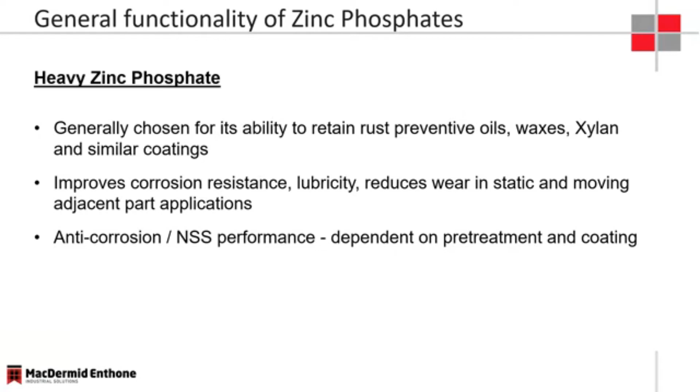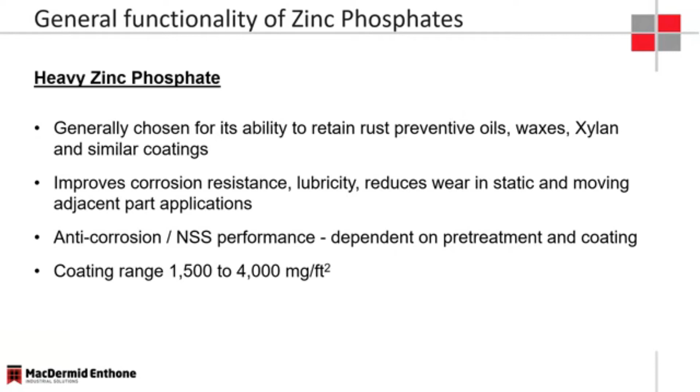Some examples that we can give would be if we look to the automotive industry as an example and look at heavy zinc phosphate and oil specifications. Typically, those are going to require anywhere from 24 to 168 hours of neutral salt spray performance. At an opposite extreme, if we look at the oil and gas industry and look at fasteners coated with heavy zinc phosphate and used in combination with a fluoropolymer coating, those can achieve up to 3,000 hours. So again, the anti-corrosion performance is entirely dependent both on the quality of the pretreatment as well as the coating selected. And the requirements for this class of zinc phosphate are typically going to fall within coating ranges of 1,500 to 4,000 milligrams per square foot.

The calcium modified zinc phosphates are frequently used as bases for paints or other organic coatings. They're used extensively in rubber bonding applications, and we see their use in the automotive industry for coefficient of friction modification. The effect of the calcium in these formulations is to limit the size of and effectively modify the crystal structure of the coating.

This results in a very densely packed coating consisting of very small granular looking crystals when you look at it under magnification. And it's for this reason that you'll often hear these referred to as microcrystalline processes. Now, unlike a non-calcium modified zinc phosphate, this class is going to incorporate a small amount of calcium in the layer, and this lends itself to the very desirable functional properties of this phosphate class for the applications in which they're used.

Now, as I mentioned at the top of the slide, these are used frequently as bases for paints or other organic coatings. A big reason for that is due to the chemical resistance that they have and their ability to limit corrosion spread if the coating is damaged. You'll often hear this corrosion spread referred to as creep in the specifications. I also mentioned at the top that this class is used extensively in rubber bonding applications, and that is because of their ability to withstand frequent and very high vibrational stress loads like those encountered in the noise and vibration isolation applications of rubber bonding.

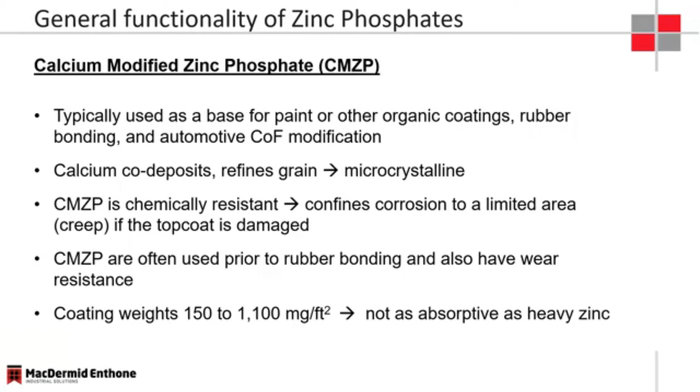The typical coating weight requirements for this class are going to fall within the 150 to 1100 milligram per square foot range. And because of the reduced layer thickness of this class, as well as the crystal morphology of this class, they're not nearly as absorptive as the heavy zinc phosphates.

The cold forming zinc phosphates are going to be used in metal deformation applications, and I've listed several examples here. And because of the very high friction loads involved in these kinds of applications, the phosphate is going to be used in conjunction with a lubricant.

We find that these are typically formulated as nitrite or chlorate accelerated systems. The reason for that is that these oxidizers limit the iron growth in the bath. And when we limit the iron available in the bath, we limit the amount of iron incorporated into the phosphate layer. By limiting the iron in the phosphate layer, this results in a reduction of abrasion of the phosphate coating, which is a desirable attribute for these phosphates in the applications in which they're used.

To further address the frictional aspects, this class is often going to be used in combination with a grain refiner. This is to create a smoother and more uniform crystal morphology, again, to create a layer that has the desirable characteristics for these high friction applications.

The coating weights for this class are typically going to be required to fall within the 300 to 2000 milligram per square foot range.

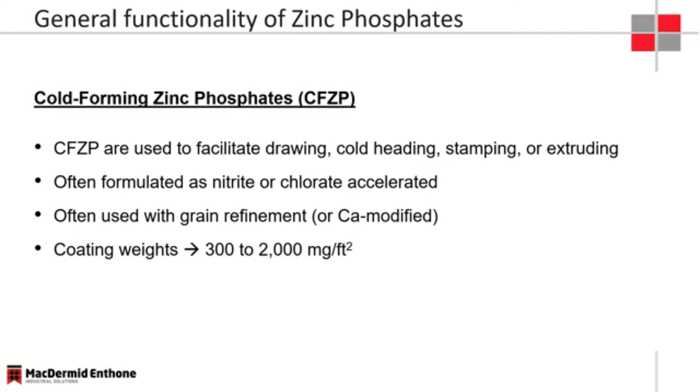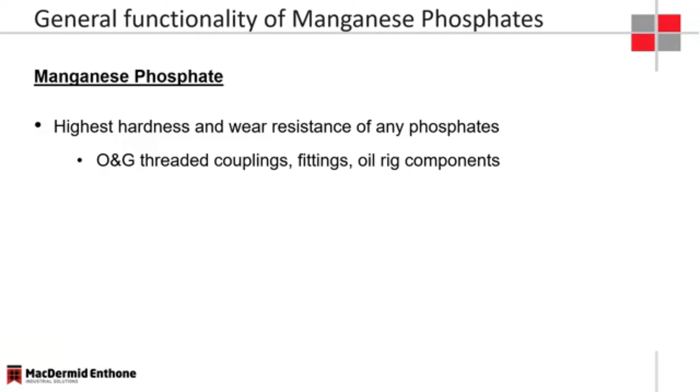The manganese phosphates are by far the hardest and most wear resistant of any of the phosphate classes. For this reason, they are extensively used in the oil and gas industry for coating threaded couplings, fittings, and a variety of oil rig components. They're also extensively used in the automotive industry for coating powertrain components.

The manganese phosphates are far more stable than our zinc phosphates under conditions of very high temperature and pressure. This is due both to the chemical constituency of the manganese phosphate as well as the very densely packed cubic crystal structure of the grain refined manganese phosphate layer.

Unlike zinc phosphates, it's really essential with manganese phosphates to use these in conjunction with a grain refiner. This is to create both a more corrosion resistant layer and to create the wear and friction resistant crystal structure required for its high wear applications.

Coating weights for the manganese phosphates are typically going to be required to fall within the 750 to 3000 milligram per square foot range.

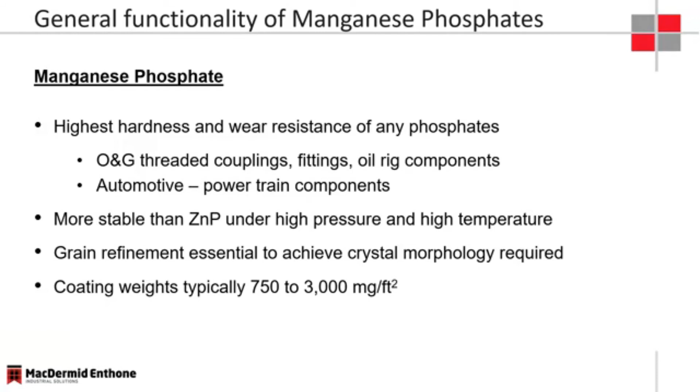Now let's take a look at MacDermid Enthone's nickel-free best-in-class products, beginning with the zinc phosphates first and KeyKote 501. KeyKote 501 is a nitrate accelerated product. It is a single component calcium modified product that is commonly used in pre-paint and rubber bonding applications.

The 501 process offers customers the flexibility to operate this as a nitrite accelerated process by using the additive KeyKote 303. When we operate KeyKote 501 in this manner, it allows for a significant reduction in operating temperature of as much as 18 degrees.

KeyKote 514 is also a nitrate accelerated product. This is a two-component calcium modified product that is commonly used in both pre-paint and cold forming applications. And I'm a big fan of two-component zinc phosphates because of the stability and enhanced performance that they can bring to the table.

KeyKote 750 is once again a nitrate accelerated process. This is a two-component mid to heavy coating weight product that is commonly used in applications where either corrosion control is needed or lubrication is needed.

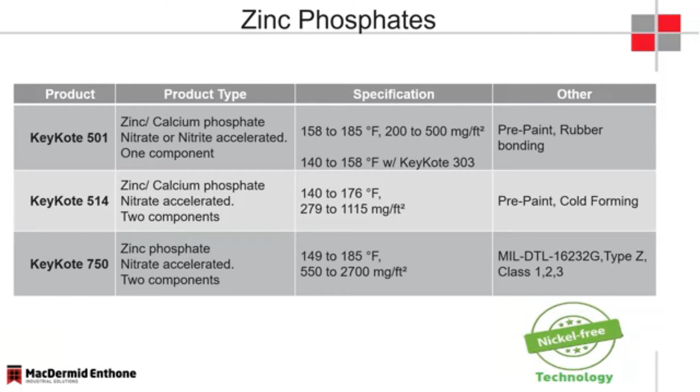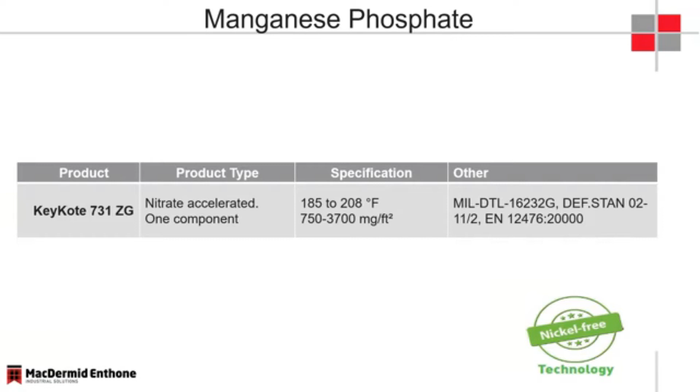We purposely chose these alloys because they're often associated with difficulties in consistently obtaining coating uniformity, coating weight, and adhesion in the field. What's noteworthy here is that we were able to achieve complete coverage, uniformity, and adhesion across all of the alloys at just 185 Fahrenheit with 10 minutes immersion and without the need to change bath parameters.

By way of contrast, typically if you were trying to phosphate these alloys using a traditional nickel catalyzed manganese phosphate process, you'd be operating at significantly higher temperatures of typically 200 to 210 degrees Fahrenheit. So with the 731ZG process, we were able to shave 15 to 25 degrees from a typical nickel catalyzed system without compromising performance, and again, without having to change bath parameters.

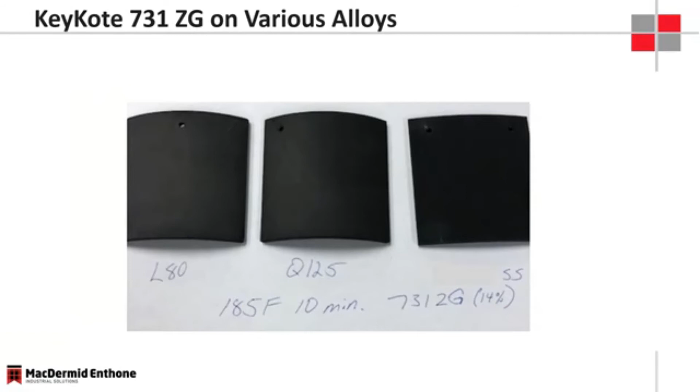With that, let's take a look now at the advantages associated with our nickel-free processes. Regardless of whether we're talking about nickel-free zinc phosphates or nickel-free manganese phosphates, our nickel-free phosphates operate at significantly lower temperatures of as much as 30 degrees below their nickel catalyzed counterparts.

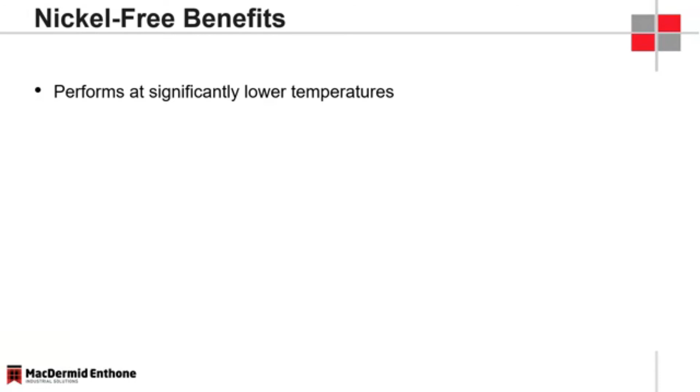And they yield very consistent coating weights and adhesions, even on traditionally difficult to phosphate alloys, like the examples I list here. In addition, we've designed these processes to limit the soluble iron in the bath.

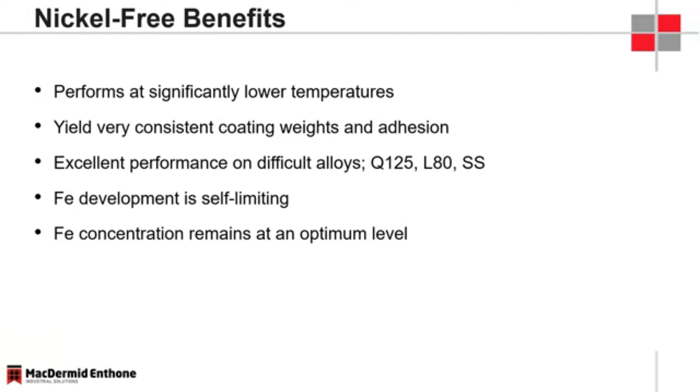What this means is that when operated properly, these baths will maintain the soluble iron within the optimum concentration range, which falls between 3 to 9 grams per liter. And what we find is that by maintaining the iron within this optimum range, it has a stabilization effect on the bath, resulting in less sludge formation.

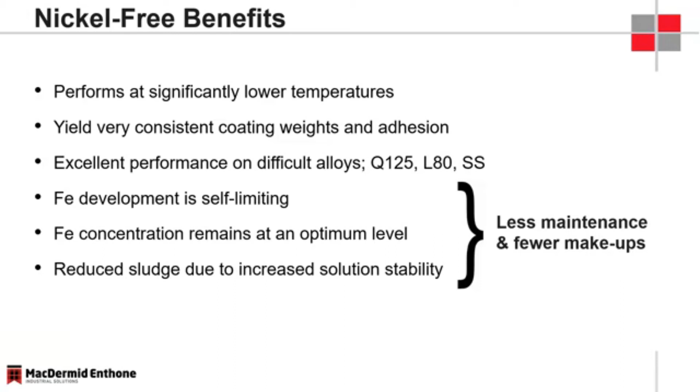All of these combine to translate into less maintenance required of the bath, as well as fewer bath makeups required.

So with that, now let's turn our attention and look at a couple of success stories. Again, these will deal with converting customers who had been using traditional nickel catalyzed systems to our nickel-free technologies. I'm not going to refer to the actual names of these customers. I'll merely refer to them as customer A and customer B.

So let's begin by looking at customer A, who is a manufacturer of pipes and couplings. When we met with customer A, they were dissatisfied with their current process. They were looking for ways to improve the efficiency and effectiveness of their process in several areas.

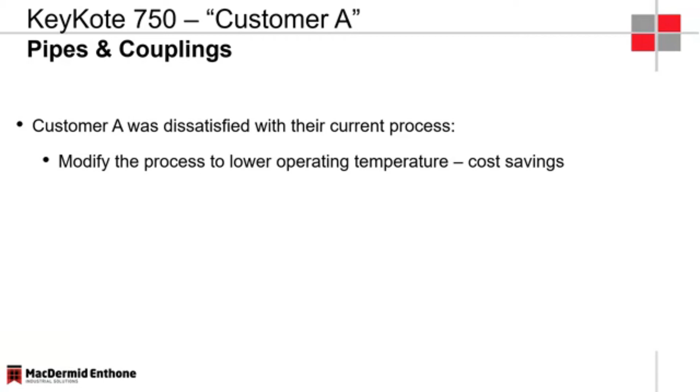One is that they were interested in ways in which they could change or modify the process in order to enable them to operate at lower temperatures. This was driven by their desire to look for operational cost savings.

They were also interested in ways that they could modify the process to improve coating weight and adhesion consistency across the various alloys they had to deal with. That interest stemmed from their current rework rate, which was fairly high. So they were looking at ways in which they could reduce their rework.

Of the alloys that they had to deal with, L80 was typically their biggest challenge. Specifically, they had difficulty consistently meeting their coating weight requirements for the L80 alloy.

And finally, they were interested in ways in which they could modify the process to reduce the sludging of the bath and to reduce the frequency with which they would have to take their tanks down to desludge.

With their current process, they were having to take the tanks down to desludge at a frequency of about every 1 to 2 weeks. So they were looking at ways to expand the window before having to take down the tanks to reduce their downtime.

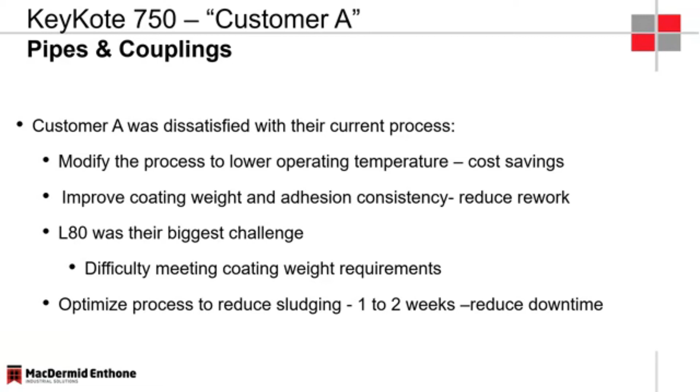So after a few conversations, we decided to go ahead and trial a bath of the KeyKote 750 process. We chose to begin with a 7% makeup concentration and a target operating temperature window of 150 to 155 Fahrenheit.

On the day that we were there to start up the process and lend technical assistance to them, they had equipment issues such that we could not proceed. So it was mutually decided that we would go ahead and leave, and then after they had resolved the issues, they would call us back.

As it turns out, they were able to resolve their equipment issues later in the day and decided to go ahead and try their hand at starting up the 750 process without any on-site technical support.

When we arrived the next day, we were both surprised and pleased at the fact that they had been able to process several loads with satisfactory results. The customer was happy by the fact that they were able to process with the results they had gotten using a process that they had absolutely zero experience with.

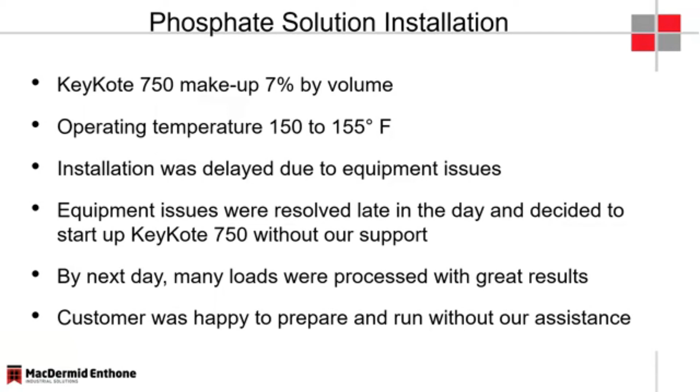So the process has now been in place for over a year at customer A, and let's take a look at a summary of the benefits that they have been able to establish during that time. They have been able to sustain a reduced operating temperature. The previous process had operated at a temperature of 175. They have been able to reduce that to 155 with the current process.

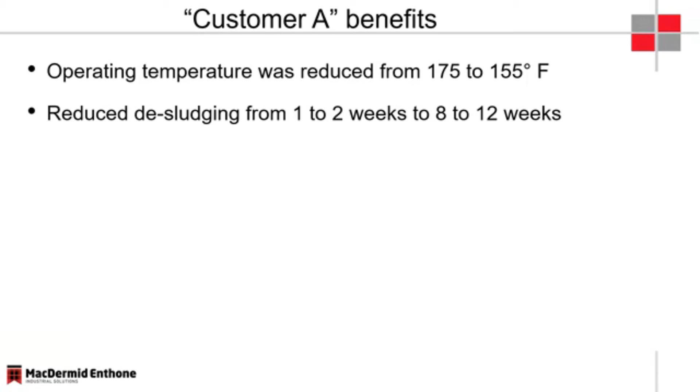They've also been able to reduce their desludging frequency. They had to take their tanks down typically every 1 to 2 weeks to desludge. We have widened that window to about every 8 to 12 weeks. And when you multiply that by the typical downtime of 6 to 8 hours, that translates into a lot of additional productive time over the course of the year.

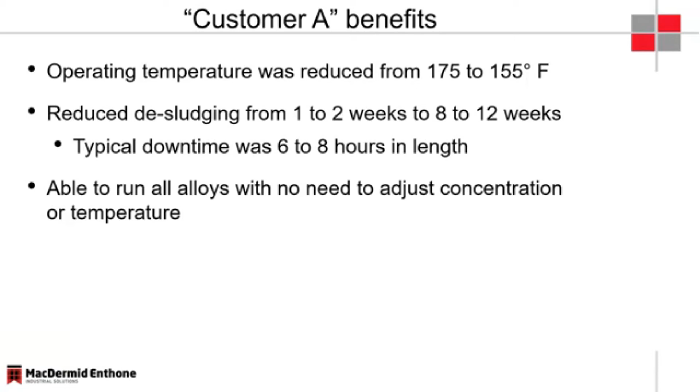The process has also enabled them to run the alloys that they have to deal with without the need to adjust concentration or temperature. And it has eliminated the inconsistency in meeting the coating weight requirements for the L80 alloy. And finally, it has resulted in a process that delivers consistent coating uniformity and the adhesion that they expect and require across the various alloys that they have to process.

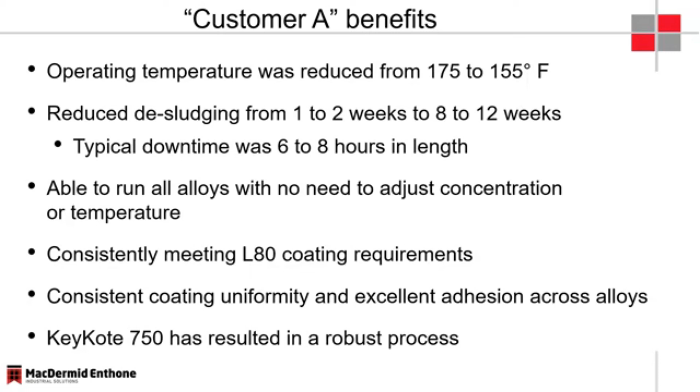So after a year plus of being in place, the 750 process has resulted in positive changes for customer A and resulted in a robust process.

And now let's take a look at customer B. Customer B is a manufacturer of drilling tubulars and accessories. We met with customer B to discuss their current process and issues that they were having. They had two primary technical challenges.

The first is that they were unable to consistently meet their coating weights across the alloys that they had to deal with. And to try to combat this, they extended the immersion time to 45 minutes. 45 minutes is an exceedingly long immersion time.

In addition to that, they had an issue with inconsistent adhesion, and this was increasing the rework that they were having to deal with, and obviously increasing their operating costs.

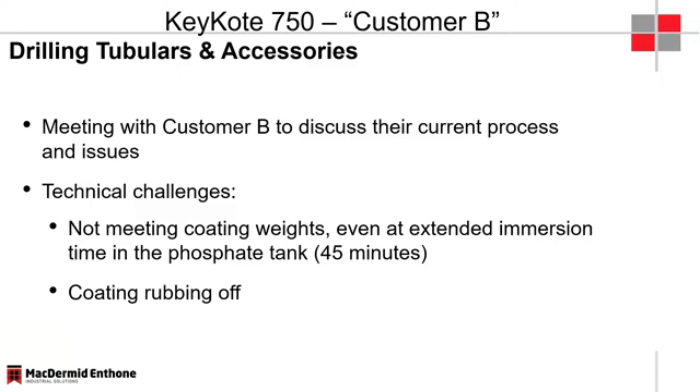So after several conversations, we decided to go ahead and trial a bath of KeyKote 750 at their plant, at one of two plants. If we were successful at one, we would go ahead and roll the process out to the second.

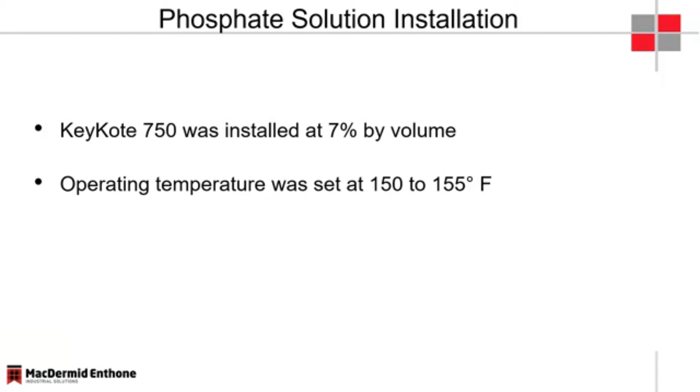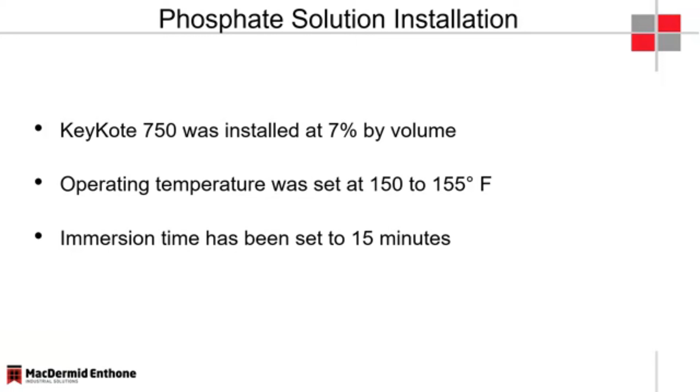Here again, we decided to start with a 7% makeup and an operating temperature window of 150 to 155 Fahrenheit. And we decided to dramatically decrease the immersion time from the 45 minutes that they had been using with their previous process down to just 15 minutes, and then we would adjust as needed.

So the 750 process has now been in place for a year at customer B. Let's take a look at the process benefits that we've been able to establish in that period of time for customer B.

So they have sustained the reduced immersion time. The previous immersion time had been 45 minutes. We've reduced that to 15 minutes. And that additional 30 minutes over the course of a year represents a lot of additional productive time for the customer.

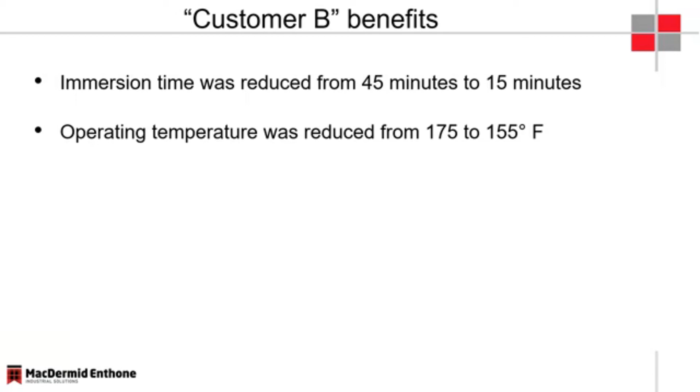In addition, they've been able to sustain a reduced temperature. Their previous process operated at 175 Fahrenheit. We've dropped that to 155. This 20-degree differential over the course of a year represents additional cost savings.

The process has enabled them to consistently meet both their coating weight and adhesion requirements across the various alloys that they have to process. And it has reduced the desludging frequency.

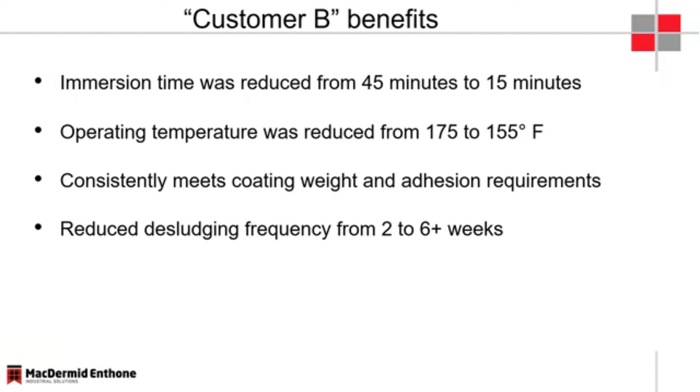They had been having to desludge at a frequency of about every 2 weeks. This has been extended out to 6+ weeks. And it has resulted in a process that enables them to use a single process for all of the alloys that they have to process without the need to adjust bath parameters.

So after being in place for a year at customer B, the 750 process has resulted in a reliable and robust process for customer B.